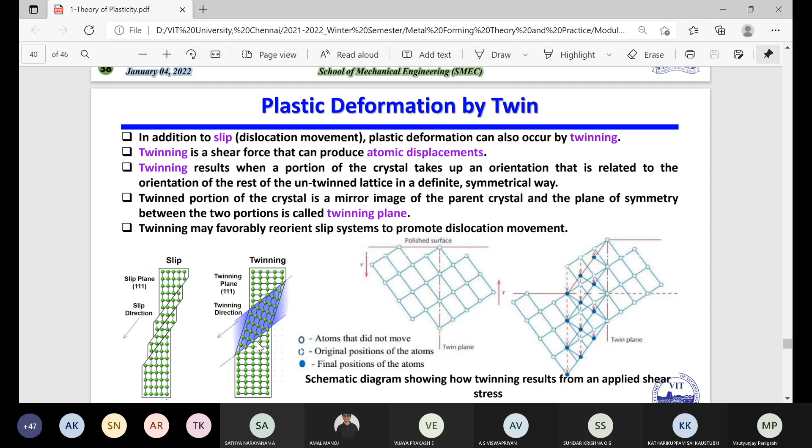Yes, sir. So now when we are thinking about twins, we have to differentiate, because if we go deeply, normally we talk about these things generally. I gave one example of a towel, after taking a shower, how we remove the water by squeezing it. Maybe I gave that example somewhere.

So here also, with twins, you cannot say that there is only one kind of twin. Twins are generally of two types: one is mechanical twins and the second one is annealing twins.

Maybe some students, why we are going a little deep, because now we have just studied the theoretical part. Maybe some students are much more interested in metal forming, so we are also relating to the research side, because we are not doing only the academic side. Some research part, of course, we are doing theoretically. So if you are interested, maybe you can go ahead in the future.

So one is mechanical twins and the second is annealing twins. Mechanical twins are generally seen in BCC and HCP metals and are produced under conditions of a rapid rate of loading and decreased temperature. If you remember, when we talked about how to remove internal stress, we talked about the heating rate, the holding time, and the cooling rate. Here also the load matters, how much you are giving and whether you are giving it slowly or rapidly, that also creates some impact.

Then second, we have studied about the effect of temperature. Whenever you are increasing temperature, something will happen, and when decreasing temperature, also something will happen, and that also depends on the rate of decreasing or rate of increasing.

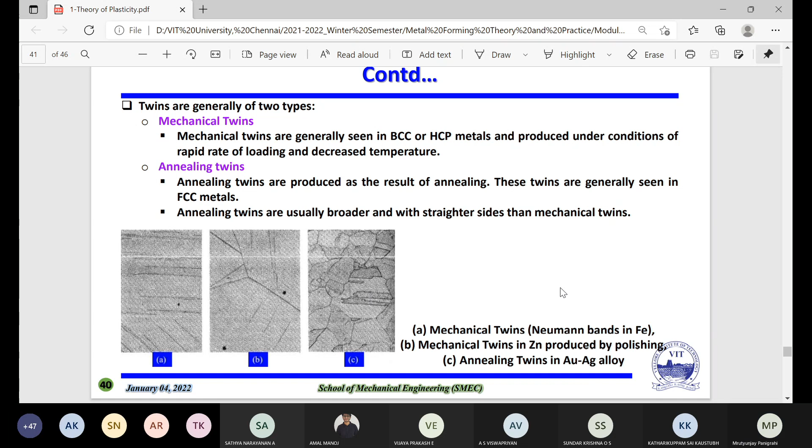So then I put some database of the twin planes and the twin direction. If you have the crystals, I will go from the beginning. Twinning generally occurs when the slip systems are restricted, or when something increases the critical resolved shear stress, what we discussed in the last class about CRSS. So when the CRSS is increasing, or when the slip system is being restricted somewhere, then twinning will happen.

So twinning generally occurs at low temperature or at high strain rate in BCC or FCC metals, or in HCP metals. You can cross check if you have three different kinds or varieties of samples, then you can check how the deformation, the stretching of the grain boundary, or the stretching of the grains is happening.

These are the basic crystal structures we have, and typical examples we have taken. Based on this, you can take one sample each for BCC, HCP, and FCC, then see how the planes look. But if you want to go for TEM, of course we don't have that here. TEM would make it much clearer, in nano scale. If the grain structure is very small and you cannot see it by scanning electron microscope, you can go for TEM. But you can find it in SEM also, there's no issue.

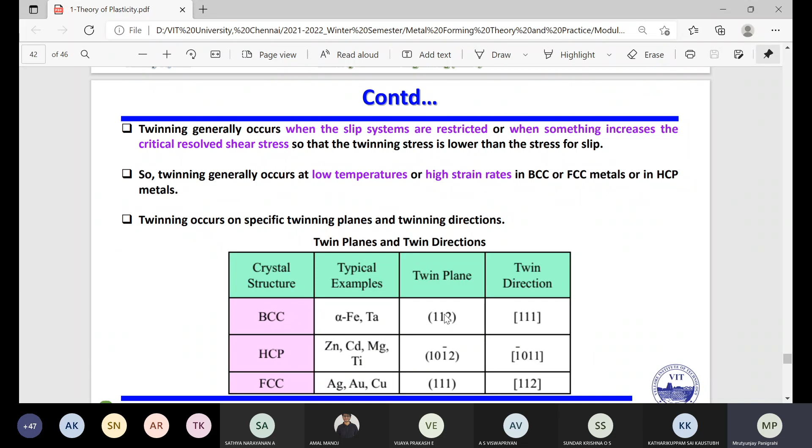This slide is much more important now. I have given very few points here for comparison, because if you know slip, somebody may ask you the basic difference between slipping and twinning. In that case, you have to distinguish by yourself.

So I have given a schematic diagram showing the difference between slip planes and twin planes, what I showed in the previous 2-3 slides. These are the slip planes, and then it is moving again. You are giving stress here, but opposite stress also exists here. Similarly, in twinning, the total surface moves entirely, unlike different slip planes.

The total, the average one or the big size, it is moving in one side. So I mentioned how to differentiate: in case of slip, the crystallographic orientation above and below the slip plane is the same both before and after the deformation, whereas in case of twin, the orientation difference is seen across the twin plane. Okay, so this is the basic difference.

Second, the slip occurs in distinct atomic spacing multiples, whereas in twins, the atomic displacement for twinning is less than the interatomic separation. Okay, so these are when you will study a little deeper, or when you will do some kind of research; now only theoretically, maybe it is very difficult to predict how actually it is happening. But from the first line, I think you can be much more clear.

And the third one, the slip leaves a series of step lines. Okay, so from the first line also you can make it clear. And in case of twinning, the twinning leaves a small but well-defined region of the crystal deformed. Okay, so whatever the region or space you are deforming or twinning, that one is clearly well-defined. So it is very clearly defined that this area is twinning.

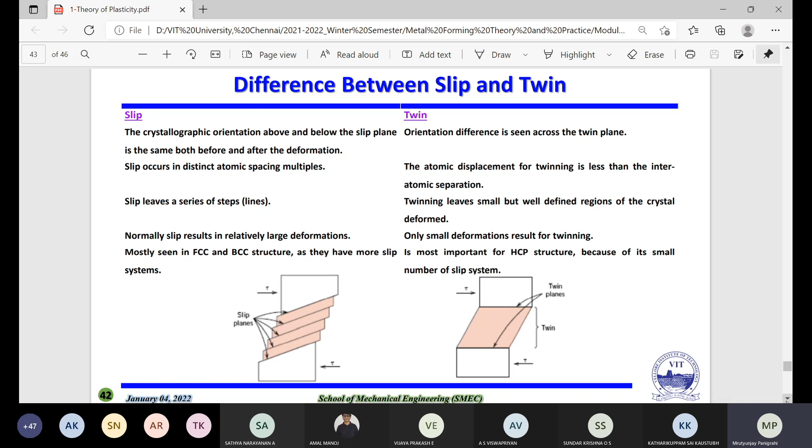Yes, sir. Okay. So next, we talked about the single crystal in the last class when we talked about zinc metal, how it happens when we apply tension or force. That squeeze kind of structure I showed you in the last class. Now we are going to polycrystalline materials. The plastic deformation in polycrystalline materials is more complex than in single crystals due to the presence of grain boundaries, different orientation of neighboring crystals, and presence of several phases.

Let me take one more example. When studying BTech or MTech, you have lots of credits: open credit, core credit, elective credit, and non-credit. Initially, in first semester, you ask a lot of questions to the proctor, and you don't have the patience to study all the rules and regulations the university provides, so it is much more complex. But by second and third semester, we will ask you if we have some doubt, because you are thorough in that aspect. Similarly, with a single crystal you don't worry about other parameters, but a polycrystalline material is a mixed one, so it will be complex.

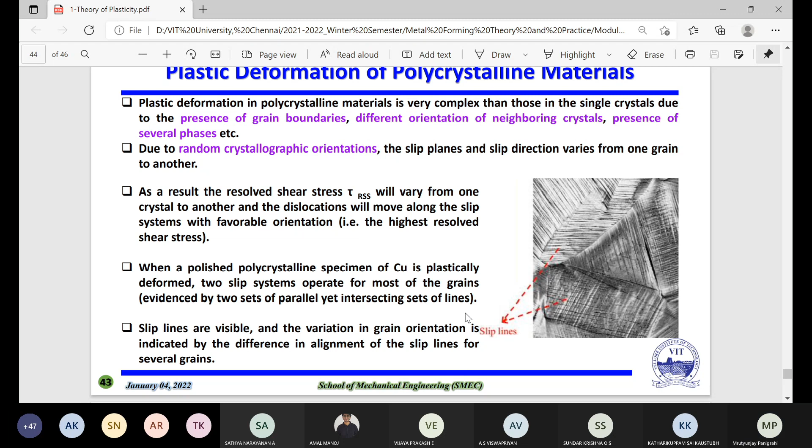Is it clear? Yes, sir. Okay.

So then one more photo I just share with you, the scanning electron microscope. Also during deformation, the mechanical integrity and the coherency are maintained along the grain boundaries. That is, the grain boundaries usually do not come apart or open up. So whenever you are doing any kind of mechanical testing, you have to think about the mechanical integrity and the coherency near the grain boundary.

As a consequence, each individual grain is constrained to some degree in the shape it may assume by its neighboring grains. So you have to think about the behavior of the neighboring grain, which also affects the next grain. You cannot tell that this grain is different and that grain is different, so there is no interlink between them. No, there should be some interlink because they are connected. So there should be some bonding, or some chemical bonds are there.

Initially you had some grains, then they are stretched, then again you will find some small grains, then again they grow: recovery, recrystallization, grain growth. Small grains will generate there, then they will grow, then finally it will go to grain growth. After that you cannot make it larger, so that means this is already established in the growth area.

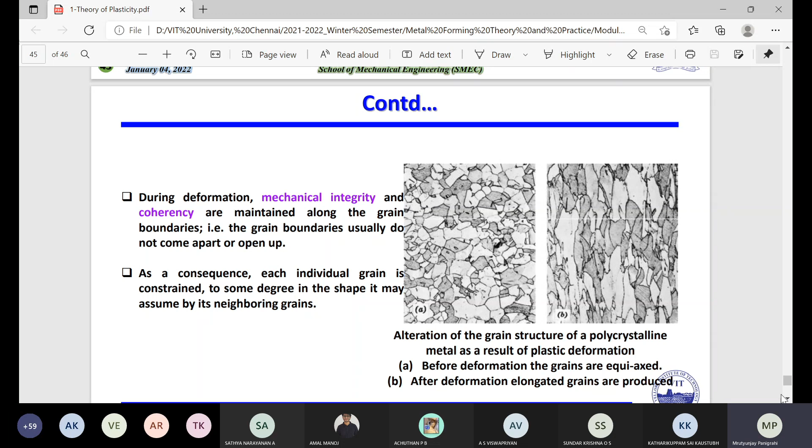Yes, sir. Okay, I think I have one more slide, the yielding criteria. We have done many things, but maybe I need one more class. In yielding criteria, I think we discussed it in the last module. I just put one or two hints there. One is the problem of deducing the mathematical relation. I asked you sometime why you are going for mathematical modeling or simulation. Maybe somebody told, I don't remember.

So I will ask you one question. Whenever you are doing any kind of experiment, you are going for ANSYS or XYZ, any kind of simulation. Can somebody tell why you are going for that simulation or mathematical modeling? What is the basic motto or the basic aim of that? Anyone?

Sir, in order to validate the results or understand the differences in the values obtained between the experimental and the analytical way of solving it. Any other? What Amal is telling, can somebody tell if he's right or wrong? Anyone? Validate, yes, to some extent, but you want to do it before you actually do it in real life, so you don't have to cut material and waste it. Yeah, this is Avito, right? Okay, anyone want to add to Amal and Avito? No one? One more, yeah, add it.